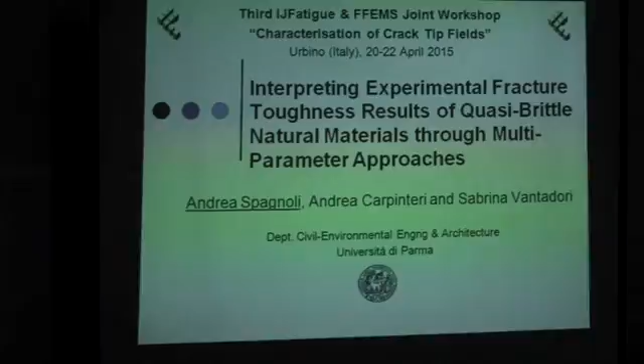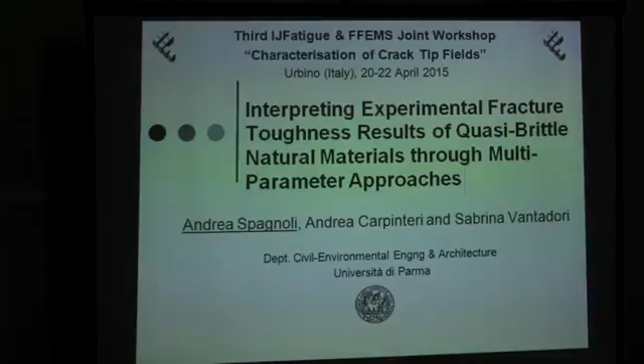Speaking about civil engineering, the topic I'd like to talk about today relates to building problems, in particular some problems related to the cladding of buildings made with natural materials. These materials are characterized by quasi-brittle behavior in fracture, but compared to concrete, they have been much less investigated. I'll show some experimental results and their interpretation using multi-parameter approaches.

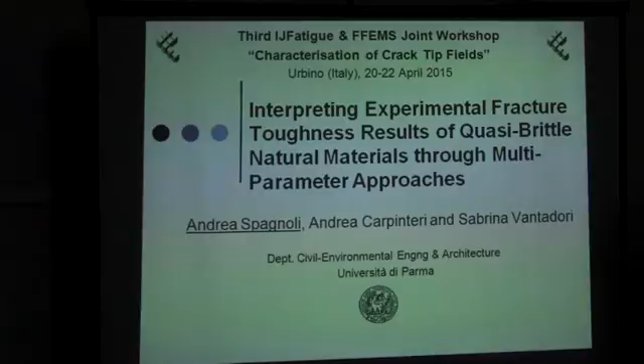What is the motivation of the study? As I said, we are interested in problems related to the cladding of buildings. In particular, we were studying ventilated facades where the slabs used were made of natural stones, specifically marbles. These elements are subjected to a number of different actions, including temperature variation, daily and seasonal, mechanical loads, as well as chemical and humidity changes.

These two buildings were the ones we were involved in studying, and they were covered by two different kinds of marbles. The one on the left is a white marble from Carrara, and the one on the right is a red marble from the area of Verona. With this motivation, we wanted to investigate the fracture behavior of these two materials.

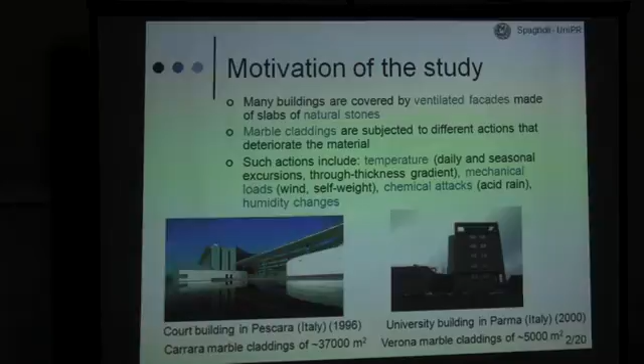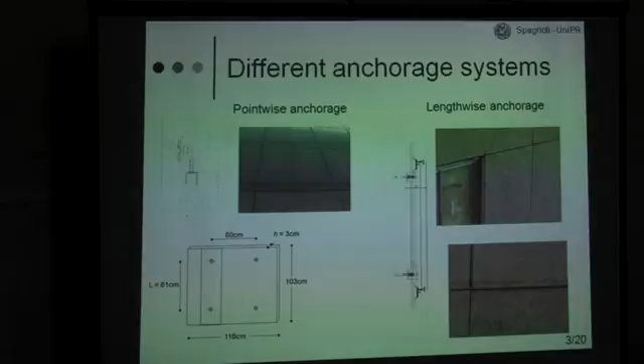This covers some technical aspects of the cladding system related to the boundary conditions of the slab. There are different anchorage systems: some are characterized by pointwise anchorage, whereas in other cases there are lengthwise anchorage. The dimensions of the slabs are of the order of tens of centimeters, and the typical thickness is 2-3 centimeters.

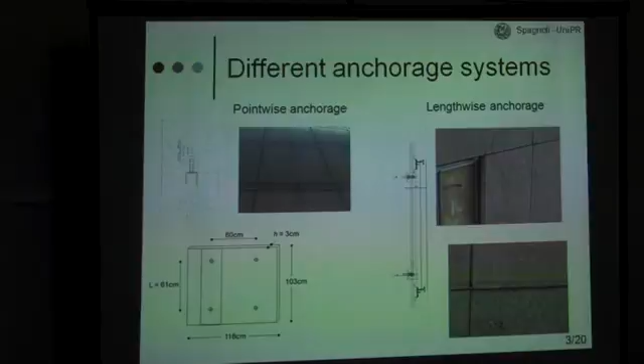Speaking about the white Carrara marble, one of the main concerns of applying this material to building cladding is its deformability. One aspect experienced in these two famous buildings, and reported in other cases, is bowing—a phenomenon of permanent deflection of the panels related to the thermal excursion of these panels.

The one on the left is the Amoco building in Chicago, where you can see indications of bowing of the order of more than 30 millimeters in panels about 1 meter in size. The one on the right is the Finlandia Hall in Helsinki, with roughly the same size of bowing. In both cases, the thickness of these panels is about 3 centimeters.

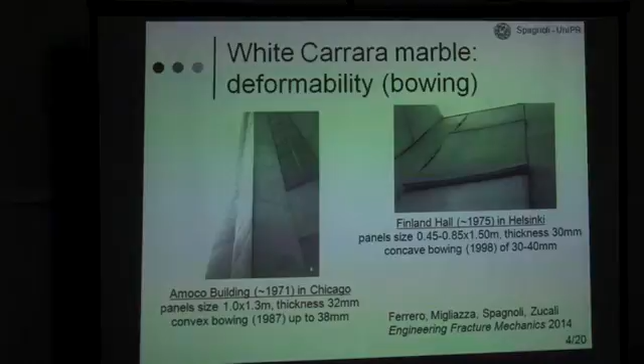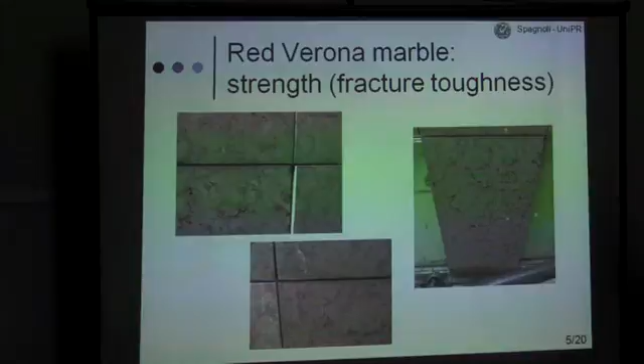In the case of Verona marble, one of the most frequent problems is related to the strength of the material itself, with experience of cracking and some surface detachment. This problem is mostly related to the strength, and more specifically the fracture toughness, of the material. For these two kinds of marbles, we wanted to perform investigations starting from microstructural features, and then mainly mechanical testing.

As for the orientation of the grains, there's an important characteristic related to the thermal deformability of these calcite grains, which is anisotropic. This was investigated in previous work of ours, where we built a model to describe this anisotropic thermal behavior and relate it to the overall bowing of the marble slabs.

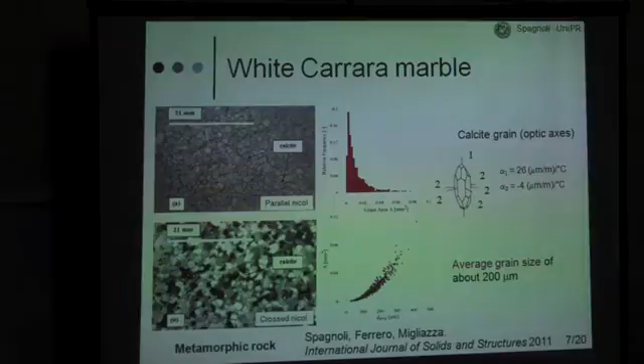When you go to Verona marble, it's called marble again, but it's actually a different kind of rock - this is a sedimentary rock. When you look at the microstructure characterization, you see very different features. There's a large amount of organic phases related to thin-shelled bivalves, and the matrix of microcrystalline calcite is of the order of 5 microns in size.

So the features of the material in this case are much more refined, and it's also much more complex, with different characteristics and multiple phases in the material.

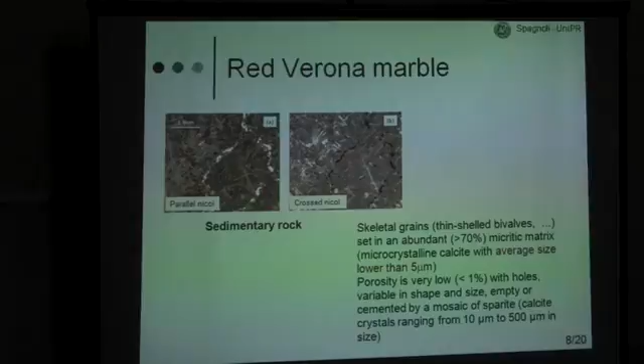As for the experimental tests, we first had the tensile strength from bending testing. What I want to mention is that the mean value of strength is quite similar in the two marbles, but in the case of red Verona marble, you have a much larger scatter of results, with a coefficient of variation of about 0.3. This can be attributed to heterogeneity in the material - for instance, these two results show the fracture surface on the left.

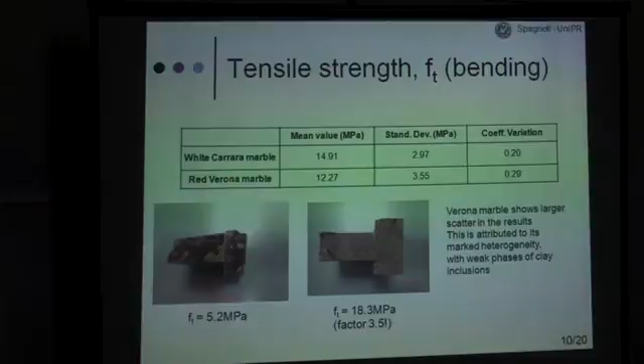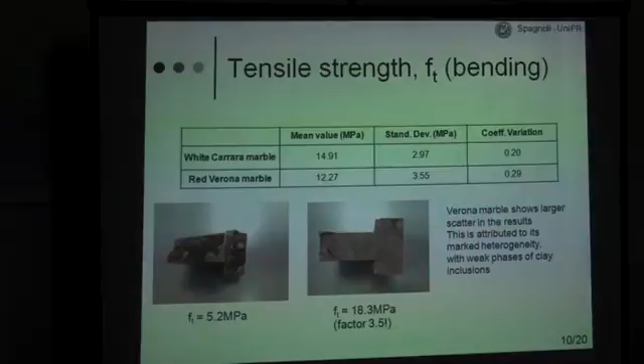There is what corresponds to a much lower tensile strength compared to the one on the right. I'm picking two extreme cases here, and the lower bound is related to some weak phases in the material, due to clay inclusions in the texture.

So the main focus is on fracture tests, and we performed a 3-point bending test on an edge-notched beam. These are the 6 results for white Carrara marble, and on the right, 7 results for Verona marble, in terms of nominal stress versus crack mouth opening displacement.

What we can see from the very beginning is that there is a non-linear behavior prior to the peak load, identifying clearly this so-called quasi-brittle behavior. So these curves are pretty similar to the curves you can find for concrete, but as I said at the beginning, there is much less experimental data available in the literature for these natural materials.

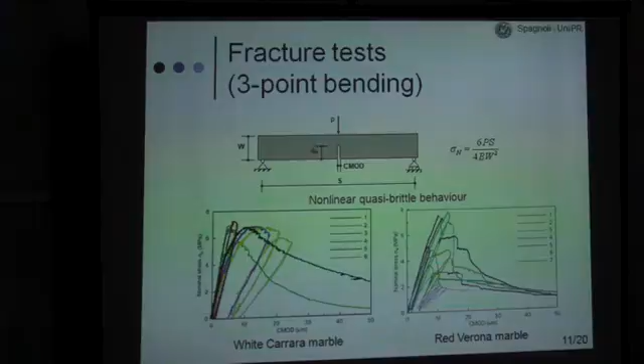So what we start with at first is to have a calculation of the toughness based on linear elastic fracture mechanics from the initial notch length, and these are the two values, mean values that we work out for the two materials.

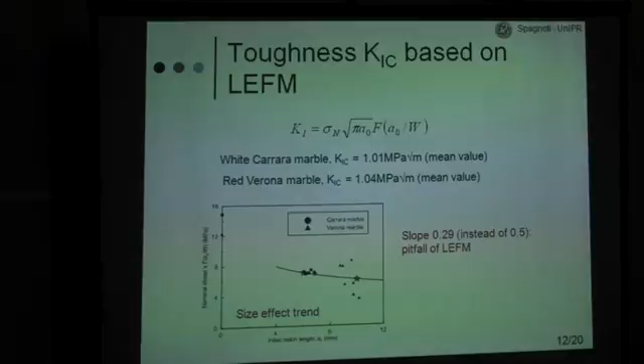And they are pretty close. What we can see clearly is that if we represent the data in a plot of nominal stress adjusted by the relative notch depth versus the initial notch length, you can see that the trend of the results is not following linear elastic fracture mechanics, so as expected.

So what we wanted to show here is how we could use different approaches based on further parameters to describe these experimental results. The quasi-brittle behavior is related to a finite size fracture process zone ahead of the crack tip, characterized by a certain length L. Depending on the ratio between the characteristic size of the structure and this length L, you might have a non-linear behavior and a size effect.

One of the very first models used by the concrete community to describe this quasi-brittle behavior is the cohesive crack model by Hillerborg, which needs the use of two parameters: one is the tensile strength, Ft, and the other is the fracture energy, Gf.

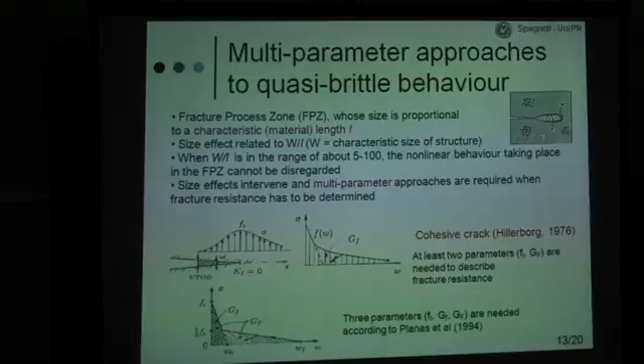There are many papers in the literature on this Hillerborg model, and there are refinements on the theory. What is very important is the cohesive law, and it's very relevant the initial slope in the sigma-W curve. For instance, Planas has proposed to use three different parameters to describe the cohesive crack behavior, one related to the initial slope of the sigma-W curve.

I'm just mentioning many other theories related to multi-parameters to describe fracture toughness: the size effect laws by Bazant and Carpinteri, the crack extension resistance curves, the finite fracture mechanics theory of Taylor and co-workers, non-local stress failure criteria, and the theory of critical distance, just to mention a few.

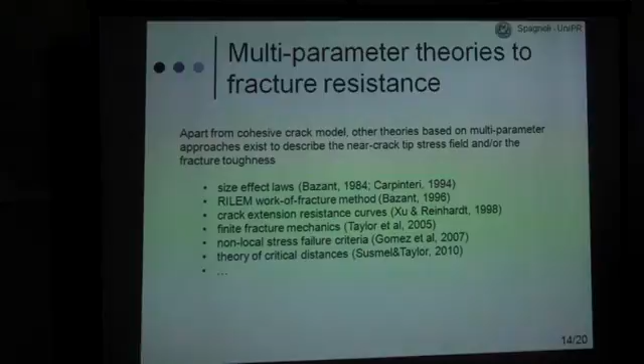All of them make use of some additional parameters for giving the fracture resistance of the material. When you use linear elastic fracture mechanics, you have to adapt the theory to add some additional parameter.

So if you consider the fracture process zone, one way to deal with this adaptation is to consider some distance, delta A, which extends the traction-free crack length into the fracture process zone. This implies the fact that you have some non-zero crack tip opening displacement.

So what we try to do is use the specific model by Shah from Northwestern University, which is a two-parameter model making use of a critical value of crack tip opening displacement. This becomes the additional parameter for fracture resistance.

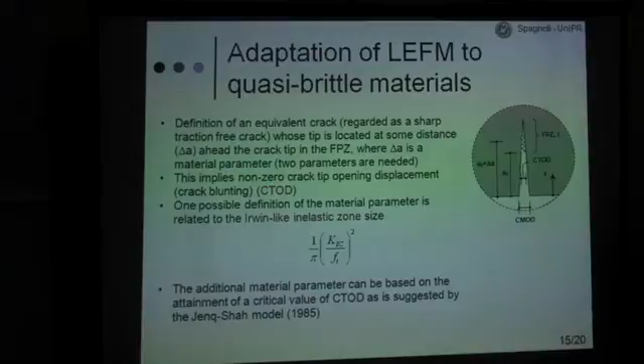This parameter needs to be calculated, still in the framework of linear elastic fracture mechanics, calculating this increment of the initial crack length A0, this delta A, through the compliance, which is the crack mouth opening displacement divided by the load.

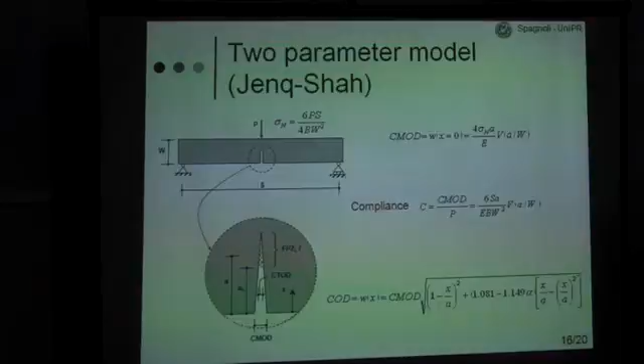The former is measured from the experiment using the clip gauge. So these are the results, two curves from the results shown before. From the initial compliance you work out the Young's modulus, then from the failure compliance you obtain the effective crack length, and from the effective crack length you work out the effective toughness.

And finally you can have a measure of the blunting of the crack, what is called the critical CTOD, and eventually the length parameter Q can be calculated.

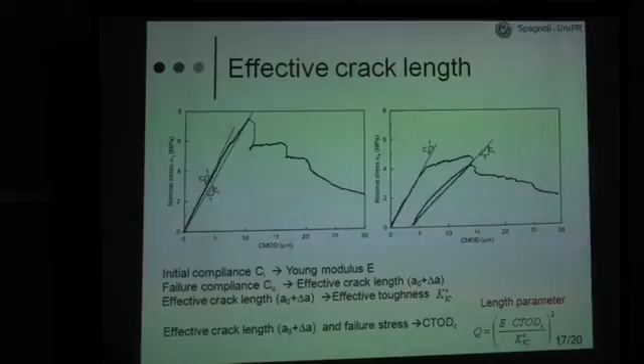So these are the results in terms of mean values and standard deviation for the two marbles I showed you. The columns in red relate to the nominal toughness shown before, and the blue column is the effective toughness using this two-parameter model.

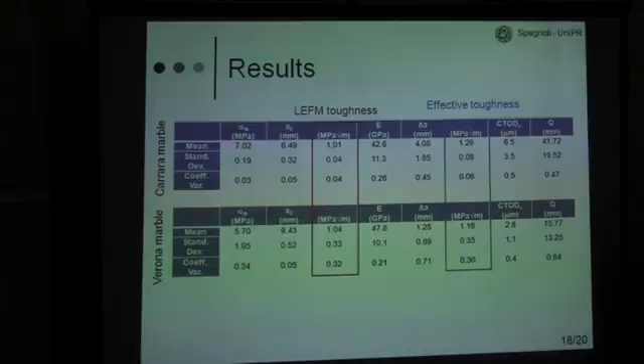Plus there are the delta A, the increment of crack to obtain the effective crack length, the crack opening displacement, and this length parameter. The main point to discuss here is that the Carrara marble shows a significant increment of the initial crack length up to collapse. This is about 20 times the mean grain size in the material, and the parameter Q is on average equal to 40 millimeters.

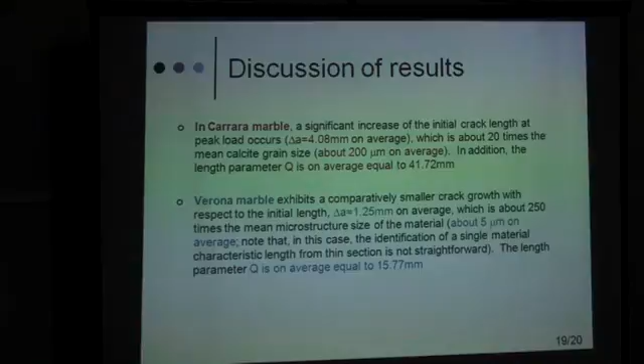In the other marble instead we have a smaller increment of crack, which is much higher than the mean microstructural size, but as I said before, in the case of the Verona marble there is no such regular microstructure of the material, and the Q parameter is on average about 15 millimeters. So what at least we can say from the results is that there is a trend between delta A, the increment of crack length, versus the material microstructure.